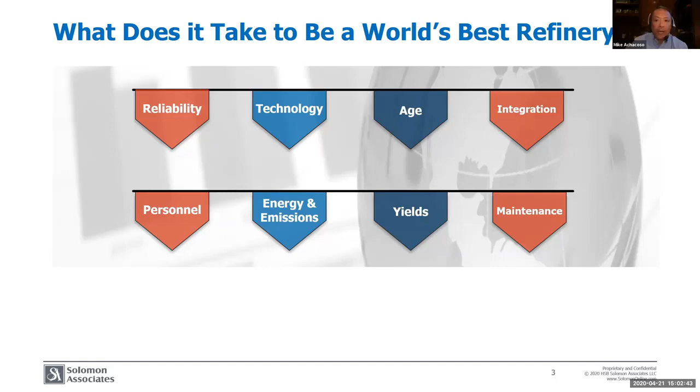These are very trying times for us. We've had a double shock in both supply and demand. And these are extraordinary times, and we're faced with big challenges. Now more than ever, the decisions that you make will set the stage for how your companies will perform after all this is over.

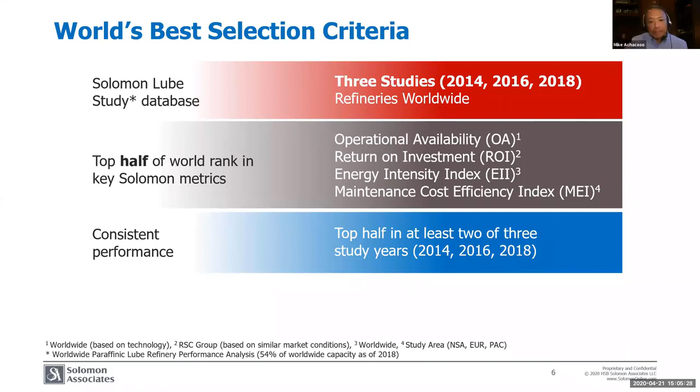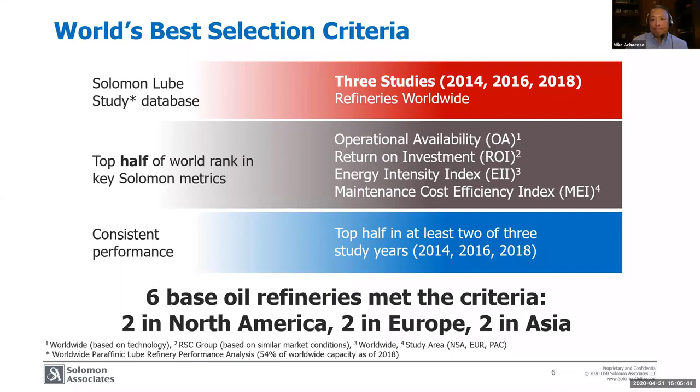There are 6 base oil refineries that comprise the world's best peer group, and they're equally split in regions of the world. We have 2 in North America, we have 2 in Europe, and we have 2 in Asia. So hopefully you understand the criteria for being a world's best base oil refinery. But what key insights can we derive from looking at their performance over time?

The first thing I'll start off with is operational availability or reliability. We see that the world's best have 97% or better operational availability. This maximizes the uptime. In a base oil refinery, if you look at the whole supply value chain, the base oil refinery is a key link in that. If you have marketers who are customer facing, they need to know that they have product on a ratable and dependable supply basis. But how does Solomon define operational availability?

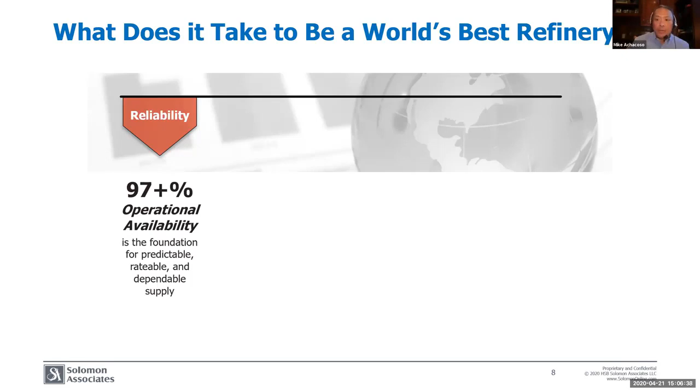First, you start out with 100% available. This means that your base oil refinery is operating at full capacity 24 hours a day, 7 days a week, 365 days a year. But we all know that our refineries need to come down periodically for both planned and unplanned maintenance. The planned maintenance usually occurs during a turnaround, and a turnaround is at a certain interval.

The number of days down, we annualize that. And we also look at downtimes that occur outside of the turnaround period. So these start to subtract from that 100% operational availability. There's also other things that happen, and we call that process and regulatory. Examples of these can be catalyst changeout. It could be heat exchanger cleanings, anything of that sort that would cause a downtime. So if you start with 100% availability and subtract these things, you have a resulting operational availability.

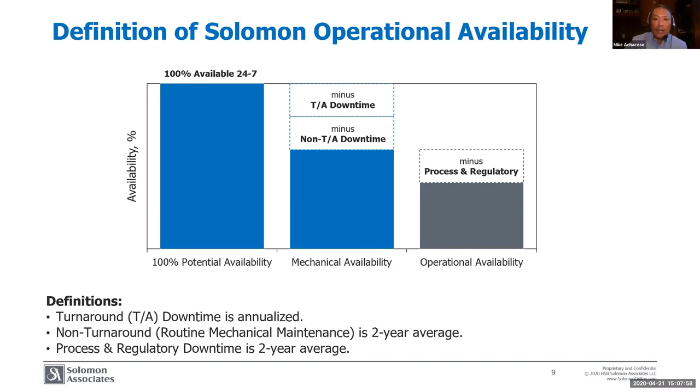I mentioned that the world's best are able to maintain 97% or better availability. Let's look at that on a worldwide distribution basis. If you've never seen a Solomon chart before, let me take a minute to orient you to how we look at this data. On the bottom or x-axis, you'll see quartiles and color codes. We split the distribution of our study participants according to quartiles, 25%. So the first quartile, or the green section, is the top 25% of the distribution.

If I go all the way to the right, the red or the fourth quartile is the bottom 25% of that distribution. We distribute this based on EDC, our equivalent distillation capacity factor, and that allows us to normalize all our refineries based on their size and complexity. So you'll see on the y-axis operational availability, and we've drawn a line on that 97% target.

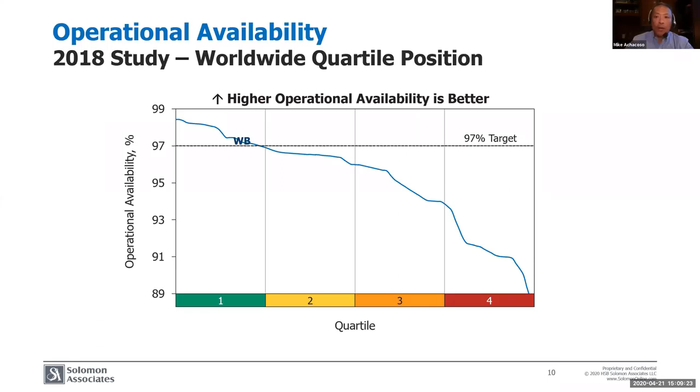The worldwide distribution, you can see that most of the first quartile actually is at 97% or better. And WB, or the world's best, is the weighted average of those 6 world best refineries. And you'll see that they are higher than 97%, and higher is better. So that's the first thing that you will find out with the world's best, is that they have 97% or better operational availability. The second thing that we looked at was the technology.

And technology is solvent-based or hydroprocessing-based. So solvent-based technology is solvent extraction, solvent dewaxing. Hydroprocessing is lube hydrocracking, iso dewaxing. A lot of people think that because hydroprocessing facilities tend to be newer, they're probably more available than the solvent technology. But looking at the world's best, of those 6 refineries, 3 of them are hydroprocessing based, and the other 3 are solvent based. So there's a mix of both.

But let's look at those 2 different technologies on an operational availability basis. So this is the same graph that I showed, but now there are 2 distribution curves. I've split the distribution into hydroprocessing, which is the red curve, and solvent, which is the gray curve. You will notice that the solvent-based facilities actually have a competitive advantage over the hydroprocessing-based. In terms of overall, the distribution has a higher operational availability.

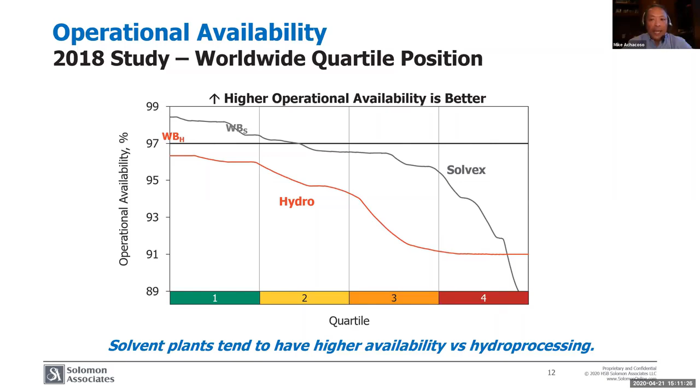That's because hydroprocessing facilities have catalyst, and they do have to come down every 2, 3, 4, 5 years to change out catalyst. That is an automatic built-in operational availability hit. I've also split those 6 world best refineries into hydroprocessing and solvent, and you can see they're both above 97%. They're both in the first quartile. All right. A misconception could be that solvent-based technology is at a disadvantage to hydroprocessing, and that's not the case when it comes to operational availability.

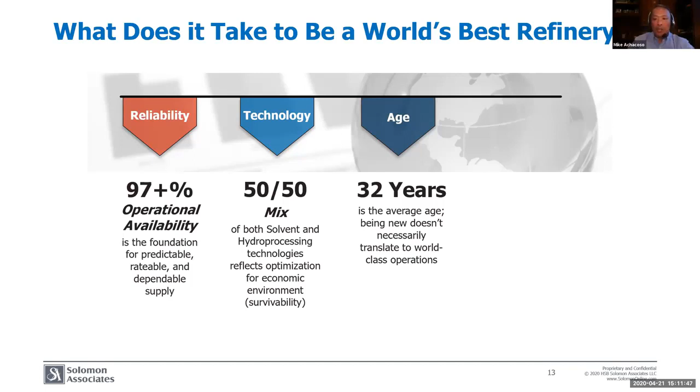Let's talk about age of the world's best. The average age for this peer group is 32 years. Some people may find that surprising because they feel that to be world's best, I have to have new equipment because new equipment is reliable and it will translate to higher operational availability. But that's not necessarily the case. Let's look at operational availability, but now I've characterized that distribution on the x-axis in unit age in years. Operational availability is still on the y-axis, and remember the world's best are a little over 97%.

If you look at this distribution, there's really no trend. There's a scatter of data everywhere. And no matter how young your facility is or how old your facility is, there are good performers and there are bad performers. And what we've seen over time is that the good performers, as their facilities age, utilize best practices to operate and maintain their facilities in the most efficient way possible. You can spend a lot of money to maintain your facilities, but if it's not targeting the right things to improve the operational availability, it's not a very efficient use of funds.

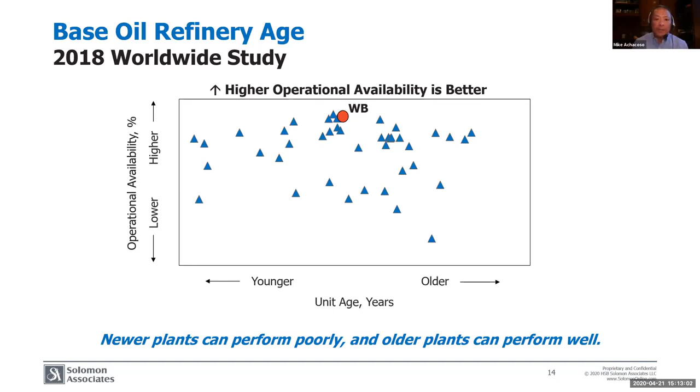Integration of the world's best base oil refinery with fuels. We found that most of the world's best refineries are integrated with a fuels refinery. And there's obvious competitive advantages for that. One, there is feedstock supply. There is a return for streams from the base oil refinery back to fuels. There's also shared services such as personnel and utilities.

That's usually the case, but there are world's best refineries that are not integrated with a fuels refinery. And that can be good because usually if you're a base oil refinery integrated with a fuels refinery, many of the economic decisions are based on fuels economics versus lube economics. And fuels economics, just due to the sheer volume, can overwhelm the lube economics. But let's not forget that lube economics, it's a smaller volume, but it's a higher margin for that volume. So while it's not necessarily a disadvantage to not be tied to a fuels refinery, most of the world's best are.

So before I go on to the next four sets, this is setting the stage now. Hopefully to this point, you're seeing a common theme that's starting to thread across the world's best. The world's best have good operational availability as its foundation. We do know that good operational availability maximizes uptime, maximizes production of products, and allows you to efficiently operate your facility. But operational availability also is the foundation for other important things in operating a base oil refinery.

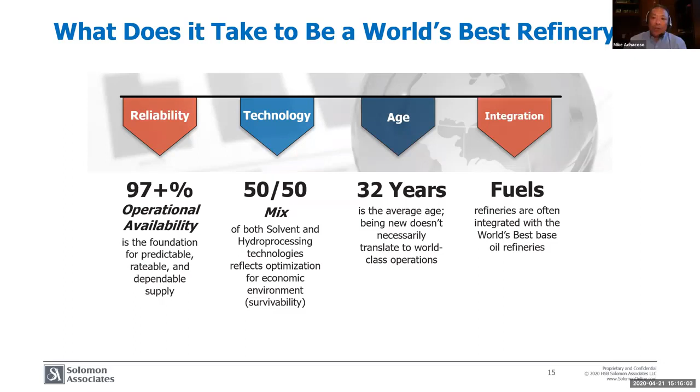So that being said, let's go ahead and dive deeper into how these world's best base oil refineries operate. How do they achieve good operational availability? And let's start with personnel or staffing. We found out that the world's best have 5% higher staffing levels for non-maintenance personnel versus the world average. Let me show you the distribution curve for that.

So again, you have the quartiles on the bottom x-axis, but now you'll see a non-maintenance personnel efficiency index on the y-axis. We look at number of work hours, and we compare that versus a Solomon standard of how many work hours your facility should be experiencing based on your size and complexity. If your index is higher, that means you have higher work hours than what we would deem standard. And as you go lower, that means that you're at or below our standard number of work hours.

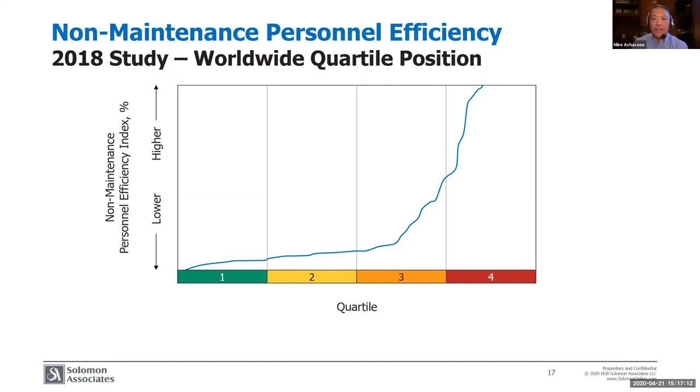When I talk about non-maintenance, these are people like operators. These are people like administrative services. These are technical people like engineers. When I plot the world's best on here, you'll see the world's best are actually in the upper third quartile. Many people find this surprising. Many people think that I have to be first quartile in everything to be world's best.

And that's a misconception, and that can be very dangerous if you look at one metric in isolation. Solomon recommends that you look at all your metrics holistically to make sure you arrive at the right decision. In this case, the world's best choose to staff higher in areas that support operational availability, such as reliability engineers, such as inspection, things of that sort. So while you may think that third quartile performance in non-maintenance personnel is bad, holistically, if that's driving high operational availability, that's a good thing.

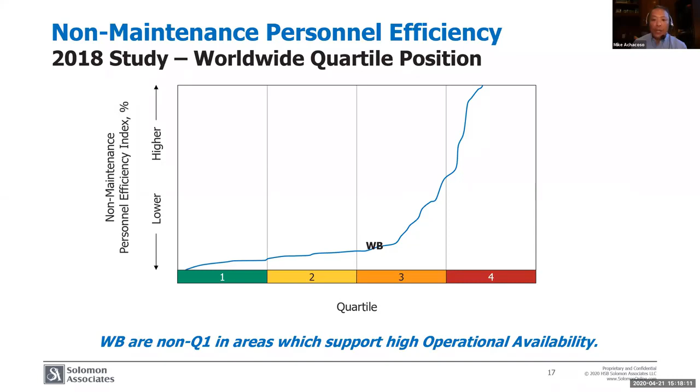Let's look at energy efficiency and emissions. We looked at the investment patterns of the world's best over time, and we found out that there was pre-investment going on for energy efficiency.

Here's a Solomon distribution curve for energy efficiency. We measure it via our energy intensity index. It's similar. We have an energy standard based on your size and complexity, and the lower your EII is, the more efficient you are. Here's the distribution curve for the base oil refineries, and you see the world's best. They're at the Q1, Q2 breakpoint.

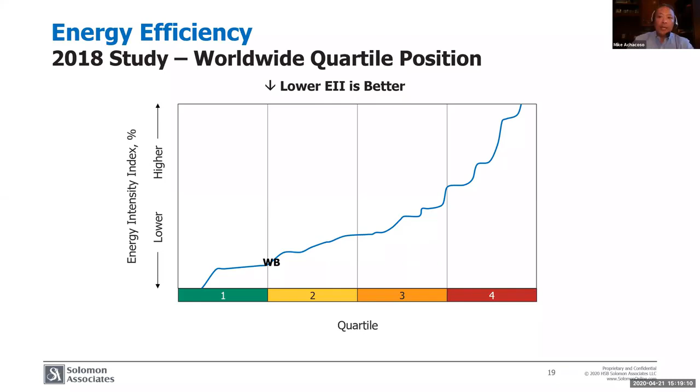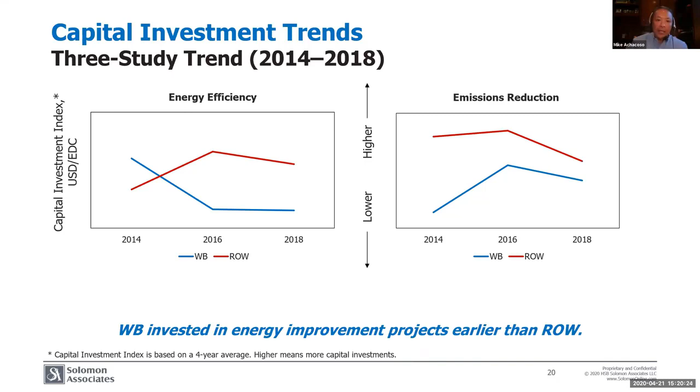But I saw that the energy efficiency occurred before the rest of the world did. Did that translate to lower carbon emissions? And this is our carbon emissions index, or CEI. Solomon's CEI measures atmospheric point sources within the base oil refinery. So I would characterize this as gate to gate. It's not to be confused with wells to wheels. Wells to wheels is not to be confused with cradle to grave or cradle to cradle.

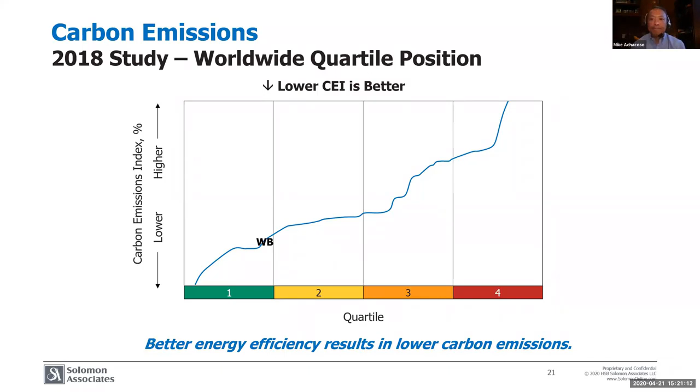It's gate to gate. And if we look at the emissions from the point sources in the base oil refineries, you'll see that the world's best are first quartile. And we've seen that better energy efficiency results in lower carbon emissions.

Let's now switch to yields. We found that the world's best actually have one quartile better performance in yields based on technology. And when I mean yields, I mean the amount of lubes, waxes, and specialties produced. Here's a distribution curve for yield, LWS, on the y-axis, and that's a percent of total input. And you'll see that I have two boxes there. I have the average yield percentage for hydroprocessing and the average yield percentage for solvents.

And if I plot the world's best hydroprocessing refineries and the world's best solvent-based refineries, you'll see that they are one quartile better than the average. So not only do they have good operational availability, but when they're up and running, they're actually taking their raw materials and upgrading it to the highest amount of yield possible.

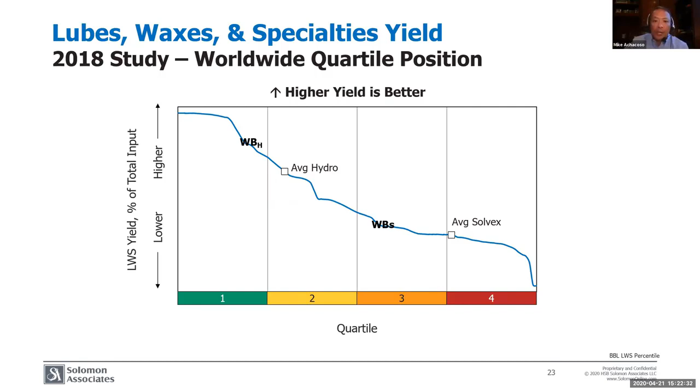So they were able to diversify their portfolio and move their portfolio and maximize products which have the highest margin. And that's very important, especially with changing market conditions. They were changing before, and they continue to change.

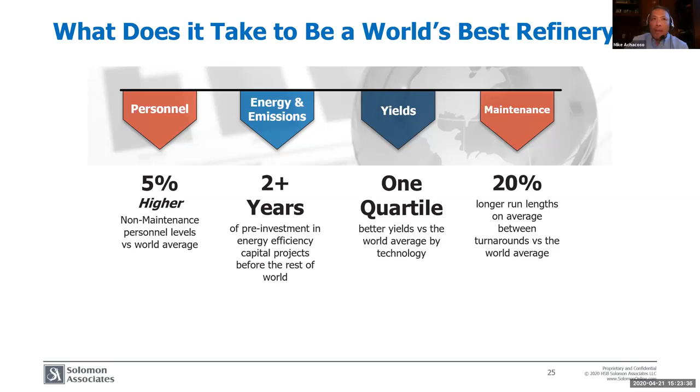I'm going to finish it up with maintenance, and in maintenance, specifically the turnaround strategies for the world's best refineries. On average, they had 20% longer run lengths between turnarounds. And when I mean run lengths, that's the amount of time between turnarounds. Our turnaround database went back to 2006. So we had 673 turnarounds in that database.

The first thing that we looked at was interval. And this is where I mentioned that the world's best have longer intervals than the world average. In fact, you'll see that there's anywhere between 17% to 25% longer intervals. And when I mean intervals, I've broken them out by some specific lube units. LHYC is lube hydrocracking, Solvex is solvent extraction, and CD-wax is catalytic dewaxing or iso dewaxing.

Now, obviously this is good for several reasons. One, the longer you can stretch out the maintenance intervals for your turnarounds, the longer that you have your equipment available to run, and that's a key to good operational availability.

But for those of us who have worked in refineries, we do know that the longer interval between turnarounds gives a chance for your equipment to break, for more pieces of equipment to wear out. And sometimes you can extend interval, but then when you do come down for turnaround, the duration is longer because you have more things to fix. You may have discovery work and you have more time spent working on unplanned things.

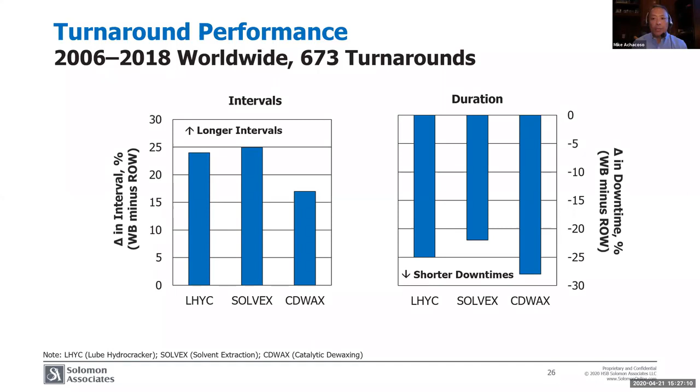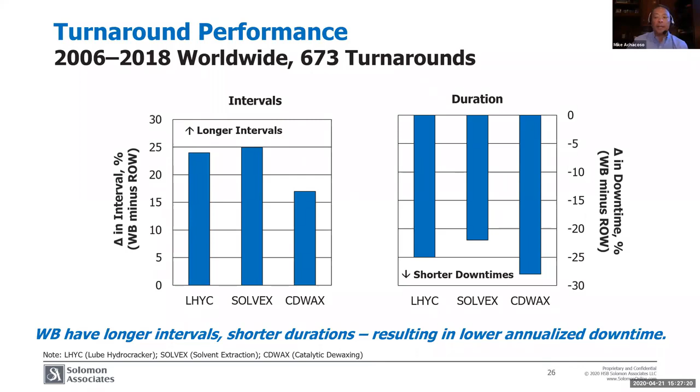Obviously, you could have higher material costs via replacing versus repair, but there's obvious advantages in terms of less personnel required to install, which then shortens the timeline, which then allows maximum uptime or shorter duration for these turnarounds. These are some of the things that we're seeing that the world's best do. So with longer interval and shorter duration, there's a lower annualized downtime, and that links all the way back to where we started with good operational availability.

So these are the 8 characteristics of what it takes to be a world's best refinery. First of all, they're very reliable, 97% plus on operational availability. It's a mix of hydroprocessing and solvent technology. They're not necessarily the newest facilities out there. Most likely they're integrated with a fuels refinery for advantages there. They tend to staff higher in areas that support good operational availability.

They've invested in energy efficiency because they realize that good energy efficiency results in lower carbon emissions. They maximize their yields, and they maximize yields of the highest valued product. And they're very optimized on their turnaround strategy that allows for longer intervals and shorter durations.

Our goal is to help each and every one of you out there on your journey to achieving world's best. And I do know that, especially in these trying times, that's probably something to think about in the future, right? We just need to survive what's going on today. But, you know, we've been talking with our CEO and our management team on exactly what message we should give clients as we go through these webinars on the world's best. And I think it's very good for me to read what guidance our folks want to give you guys when it comes to this.